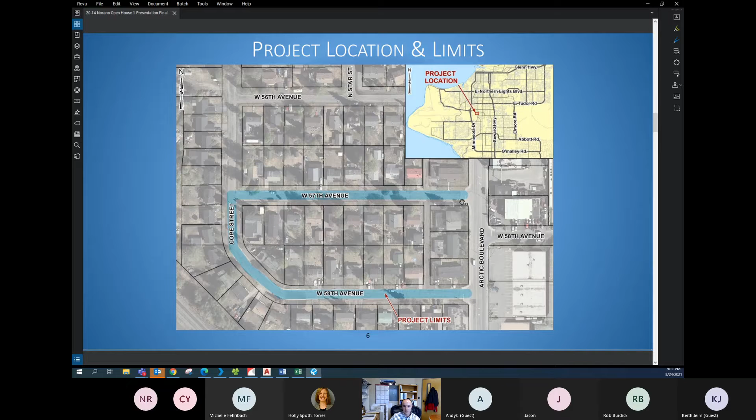That included doing a geotechnical soil investigation. We drilled six soil borings within the project limits to determine the subsurface soil conditions. From that information, we developed a draft geotechnical report with some recommendations for a proposed roadway structural section.

We also did the topographic and right-of-way surveying to map all the existing features out there. From that survey, we've developed our existing topographic base map as well as our right-of-way base map. I'll show you a view of those a little bit later in the presentation.

We also did some traffic data collection. We set up a couple speed radars on 57th Avenue and 58th Avenue to determine whether speeding was an issue, and also to determine how many vehicles per day are traveling on the roadways, to understand a little bit more about the corridor.

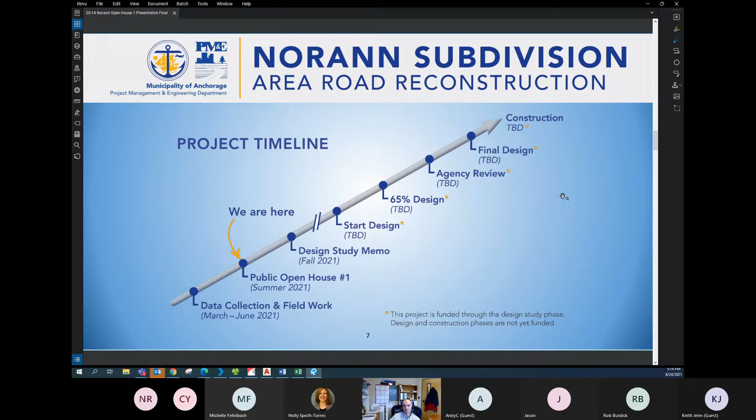I think everybody is probably very aware of the project purpose and need, but we'll just go over it anyway. The purpose of the project is to reconstruct the roadways within the project limits, improve drainage, and provide new lighting.

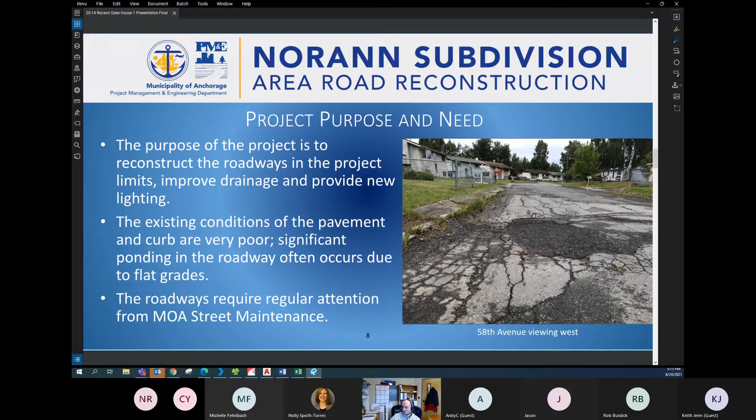Let's talk a little bit about some of the existing conditions that are out there right now. The existing right-of-way width, which is the area the municipality of Anchorage owns, maintains, and is able to upgrade, is 60 feet wide. The posted speed limit is 25 miles per hour. And 57th and 58th Avenue both have rolled curb and gutter.

From our traffic analysis, we found that the 85th percentile speed is about 17 miles per hour, which is what about 85% of the traffic out there travels at. You'll have people traveling lower and higher, but that's the normal value to track. The average daily traffic volume is 140 vehicles per day on 57th Avenue.

On 58th Avenue, similarly, the 85th percentile speed is a little bit higher at 19 miles per hour, and the average daily traffic volume is 170 vehicles per day. We didn't acquire any traffic data on Cope Street, and there's no curb and gutter out on Cope Street currently.

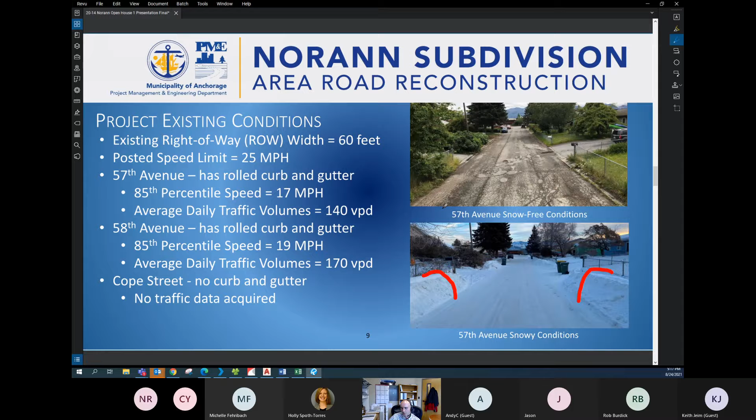Typically, the municipality street maintenance requires 7 feet of available snow storage from the back of curb. So it's definitely lacking currently, and that results in less parking during snowy conditions, and actually less space to drive. We'll talk more about some of these existing private improvements a little bit further in the presentation.

Lastly, lights are located sort of sporadically on wooden poles out there.

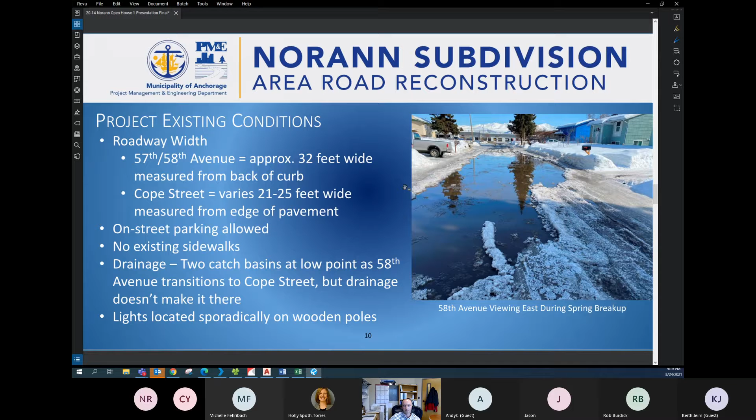Here we'll talk a little bit in more detail about private improvements in the right-of-way. These include such things as fences, retaining walls, trees, bushes, and landscaping. So to get an understanding of where the right-of-way or property line is compared to the back of curb, it's about 14 feet.

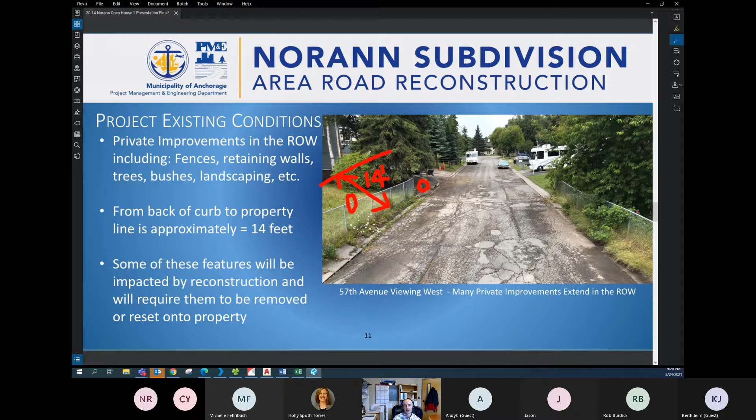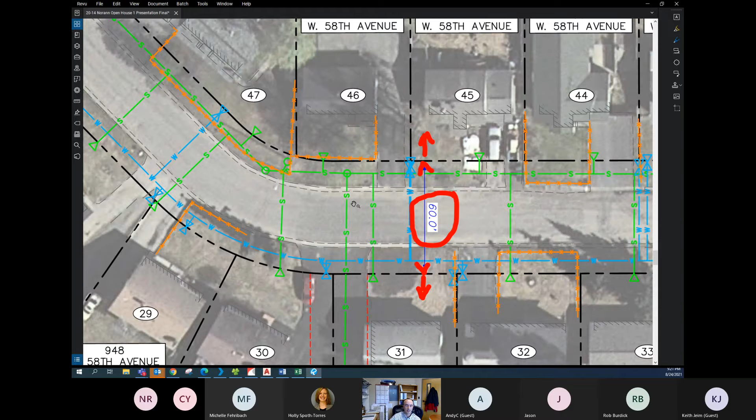What's really enlightening here is between a couple of these parcels, you can see this existing fence line on parcel 46. We did put addresses on each parcel just so you as a resident can easily figure out where you're located on the roadway. These individual parcel numbers are nothing more than identifiers we've assigned to each parcel to make it easier to track as we move the project forward.

So looking at this orange line here, these are existing chain link fences, and as you can see on parcel 46, the fence is more or less right on the property/right-of-way line. You move over to parcel 47, and you can see that fence is, I don't know, 5 to 7 feet from the property line.

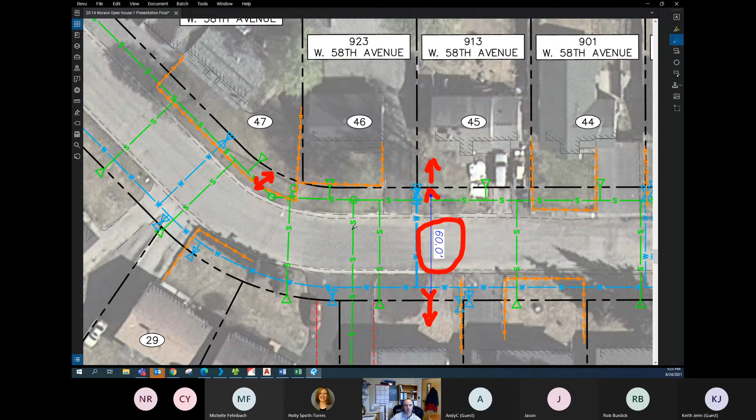This relates back to some of these existing private features being impacted during construction, and we'll either be able to reset the fences back on the property line, or if an owner doesn't want a fence reset, it can just be disposed of as part of the project. I'm sure there'll be a lot of questions about that, which we can go over, but that's the quick thing I wanted to highlight on the map.

This map will be posted, so I won't spend too much more time on it, but we've done a very extensive survey to really determine what's out there, where the property lines are, and it's going to allow us to move forward into the detailed design.

Let's talk about some of the proposed improvements. These may include an insulated roadway base and asphalt pavement, which is really intended to help protect this road from moving like it does right now.

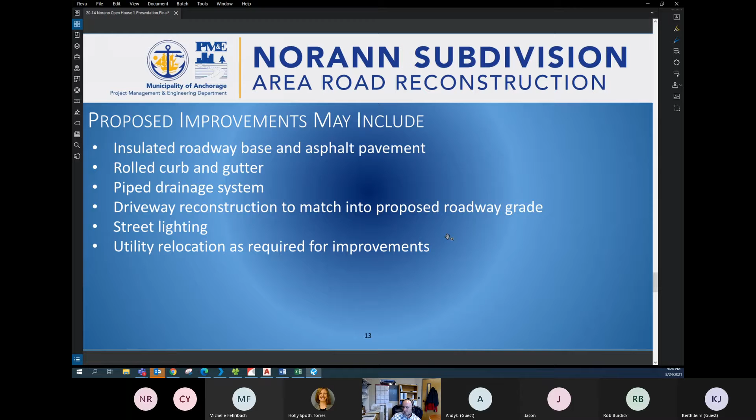Rolled curb and gutter, a pipe drainage system, driveway reconstruction to match into the proposed roadway grade, so we'll have to reconstruct people's individual driveways to match what we do in the roadway, just to make sure it's a smooth transition. Street lighting, and then there may be some utility relocation as required for the improvements.

Back to this right of way, it's 60 feet wide. So this is where the property owners own this space, and then here is the MOA owning that 60 feet of right of way.

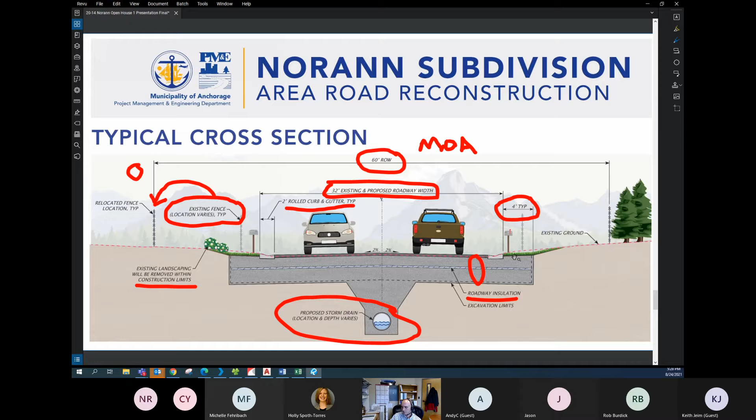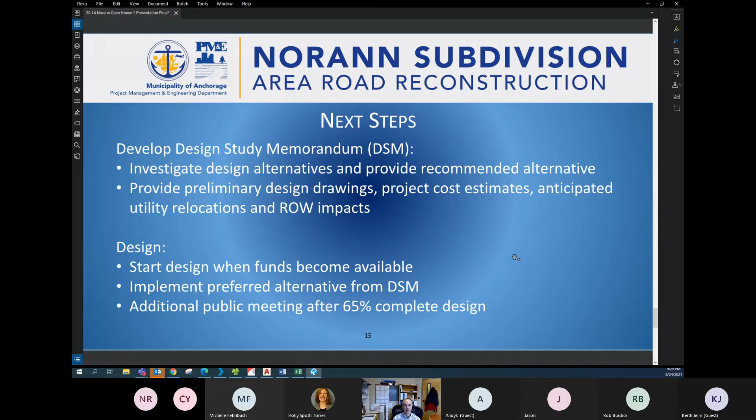So some of the next steps we talked about on the timeline already - we'll be developing the design study memorandum, which will investigate design alternatives and provide a recommended alternative. We'll be providing preliminary design drawings, project cost estimates, anticipated utility relocations, and right-of-way impacts. Once funds become available, we'll start on the design, implement the preferred alternative from the DSM, and have an additional public meeting after 65% complete design. We'll also be updating the project website as we move forward and sending out constant contact emails. So if you haven't signed up for those yet, please do so on the project website.

Okay, now locate 958 on West 58th. Okay, 958. Right here. Gotcha. Okay, you see where you have a drainage there? Yeah, this catch basin right here, that existing one. Does that drain down between the two houses? Yes, well it has.

It has caused damage because the ground on the side of my garage is eroding away, and it has removed the side wall and the back wall because of whatever is draining there has caused the garage to separate from the foundation. Okay, so yeah, and how long have you lived there?

Since 2017. Okay, so each year it just seems to get worse. I don't know if there's a leak in that drainage, but it doesn't show in the driveway, it doesn't show all the way up to the front of the garage, but about 3/4 of the way down you can start seeing the erosion of the dirt that's sinking. So it has caused the garage to separate, the wall to separate, and the foundation on the garage there is starting and has been crumbling.

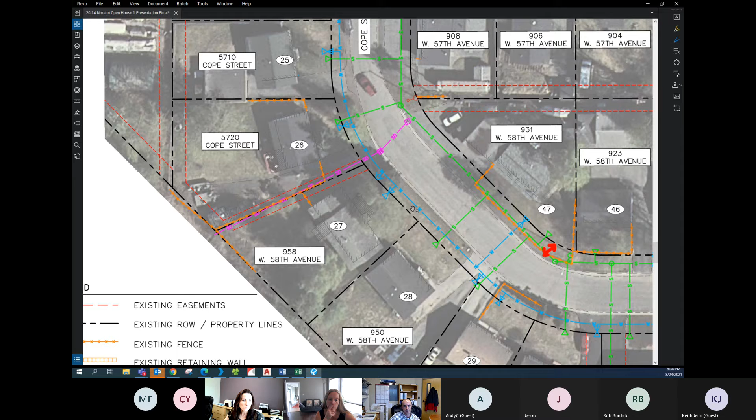Yeah, so the drainage is one of the biggest challenges that we have, not really studied in depth yet to know exactly our game plan. This outfall actually goes to railroad property, and their wish would be that this outfall just completely goes away, the storm drain line. But the challenge is to get drainage, a storm drain line, down to this point, all the way from Arctic Boulevard.

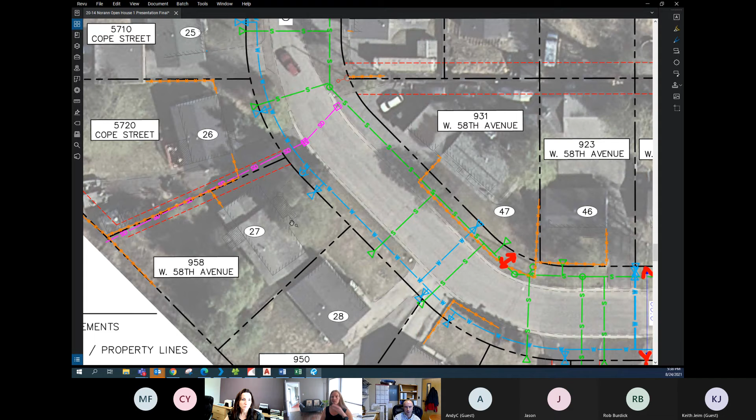We have to install the line really deep, and it's going to require a lot of relocations of sewer services and water services, and it might not even be feasible. So I don't know quite the answer to that question yet. It's food for thought.

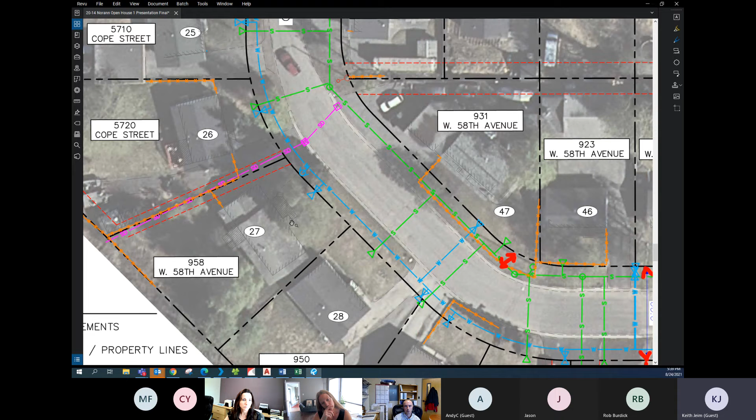My second question is, halfway up my driveway sits a municipality fire hydrant. Will that be relocated, or is that how far you're going to bring up the widening of the road? I'm just curious, asking out of curiosity.

I have friends come by and they say, I parked on the street because I didn't want to park in front of the fire hydrant. And I said, look, the city put it there. It's their fault if they put it there.

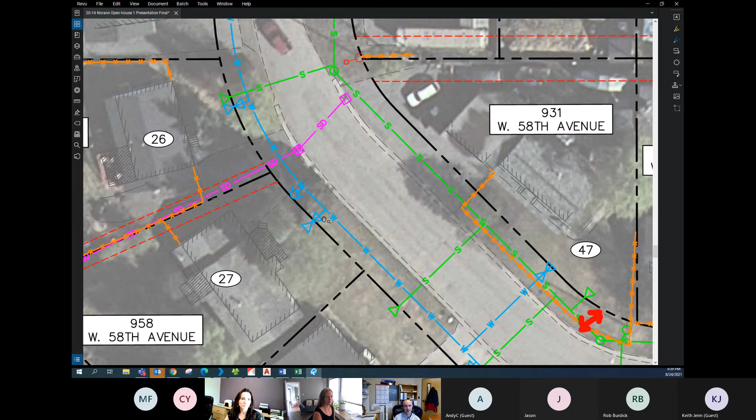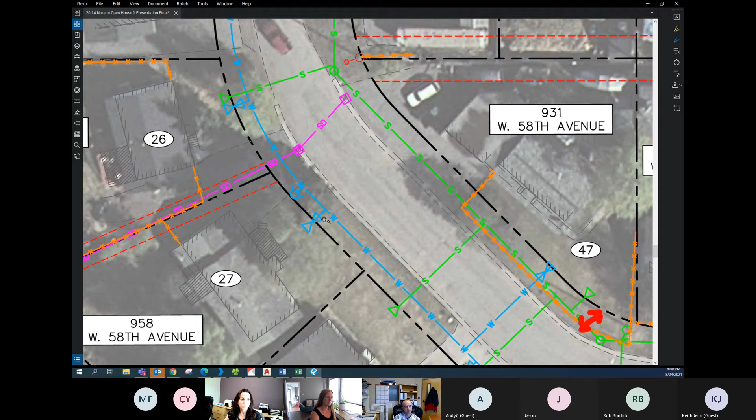The fire hydrants and the water and sewer main are in some unique locations out there currently, and we have been in communication with AWWU to make them aware of the roadway project and to ask if they have any improvements they'd like to make to their infrastructure. They have not said that they do. So the answer today would be we don't plan on relocating any hydrants, but I'm not sure if AWWU has a desire to. The only reason the roadway project would relocate water or sewer would be to facilitate the roadway design. But based on our concept typical section right now, we don't anticipate relocating hydrants.

I notified my insurance company, and they were ecstatic that it was as close as it was to the house. They're still contemplating reducing my insurance. Well, that's a silver lining.

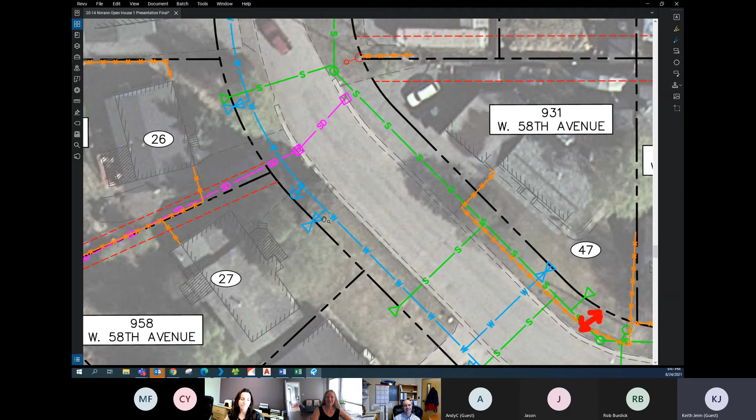Those are the only questions that I had for the moment. Okay, well, thank you very much. Are there any other questions out there? None? Okay.

That doesn't mean that's the last opportunity to ask questions. Everything we've talked about tonight has been documented. We'll write a meeting summary so that the project team and design staff all know what we've talked about tonight. Again, there's my email address. If you think of anything else you might need to talk about, you're welcome to reach out to me and I'll put you in touch with the right project team member.

Tomorrow we're going to spend a little bit of time updating the website with everything you've seen tonight, as well as there will be a self-guided virtual meeting that people can participate in. We're recording this, so if you have neighbors who didn't have the opportunity to participate tonight, they can watch this or participate in the self-guided meeting. That's also going to be available to you. So tell your neighbors so they can see what's going on with the project too.